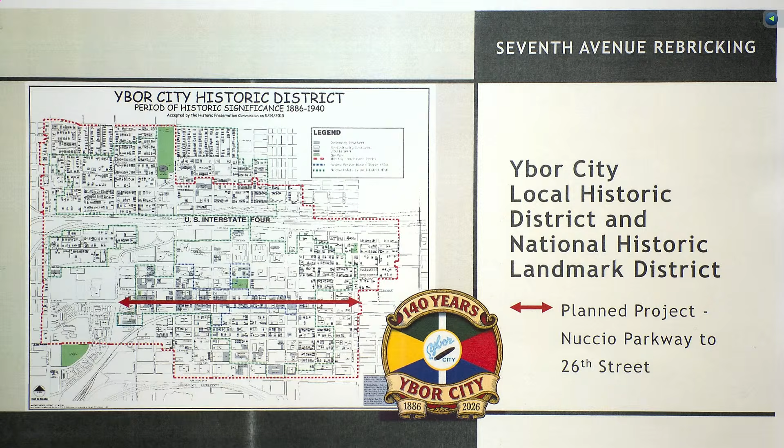So early in Ybor City's history, the roads were sandy dirt, which was not easy for most means of transportation to traverse. Bricks were laid on the Ybor streets beginning in the late 1890s through the early part of the 20th century. Later, the bricks were removed from 7th Avenue in the 50s, and the streetscape continued to change with urban renewal.

One reason for the change that was cited was that many suppliers of brick pavers had gone out of business, resulting in a shortage, and asphalt presented a less expensive, durable alternative at the time.

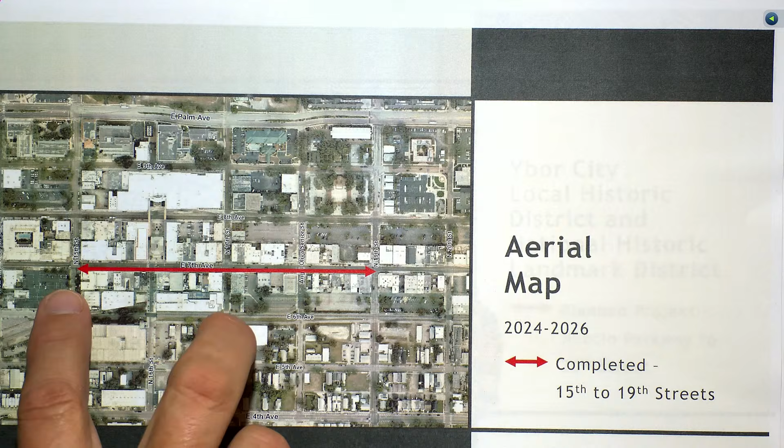15th to 17th Street, essentially this section right here, was completed in 2024. This project has been funded through Community Redevelopment Area funds, as approved through the CRA and council acting as a CRA board. Phase 2 included the area between 17th and 19th Streets, with the exception of the intersections. The intersections had to be engineered, so we had to do that separately.

And over 140,000 bricks have been laid thus far in this project. One moment, we don't have it up on our screens here, or do we not? Now we do, okay.

See some of the images from the most recent completed span. As I said, this takes large quantities of brick. Most of this brick is not in a centralized location, so it has to be acquired, and that's why the project is happening in phases.

In this particular section, we were diligent about finding a limited inventory of the manufactured brick in order to get a more consistent surface and have it be rideable. So it's always going to be somewhat traffic calming with brick, but we wanted it to be as smooth as feasible. As you can see, the red bricking enhances the character and feel of the historic district and also provides a natural traffic calming and promotes walkability.

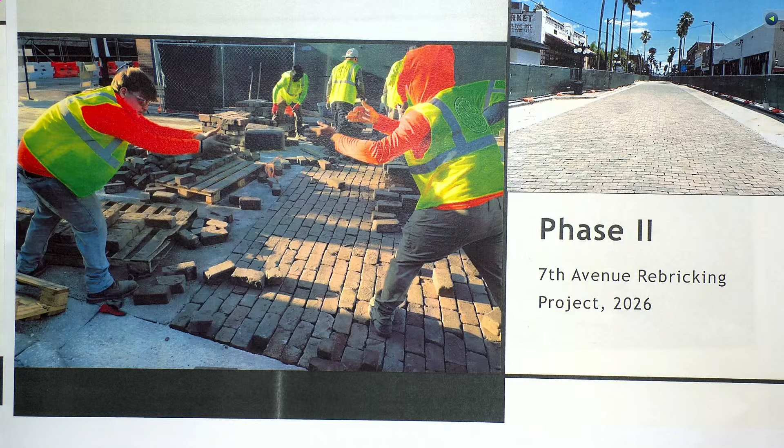And that concludes my briefing. I'm happy to answer any questions if you have any.

So next, I did want to just call to attention— oh, sorry, I was just going to say, I did a little self-guided walking tour recently, and it makes such a big difference. It looks really good. Yeah, I agree. It definitely, like we said, it enhances the character, so definitely adds to the environment on 7th Avenue.

Next, we wanted to jump into our preservation in progress, our reoccurring look at preservation in the city of Tampa and projects that are really worthy of being focused upon. This month, we're focusing on the Tampa Theater as it celebrates its 100th year. And as such, Elaine is going to provide an overview of the work that's underway currently with the theater.

Elaine? Thank you. Good morning, Commissioners. Elaine Lund, Historic Preservation staff. If we can move to the PowerPoint presentation.

We're looking at the Tampa Theater and Office Building at 707 to 711 North Franklin Street. This is a local historic landmark. Is that up on your screens? Okay, wonderful.

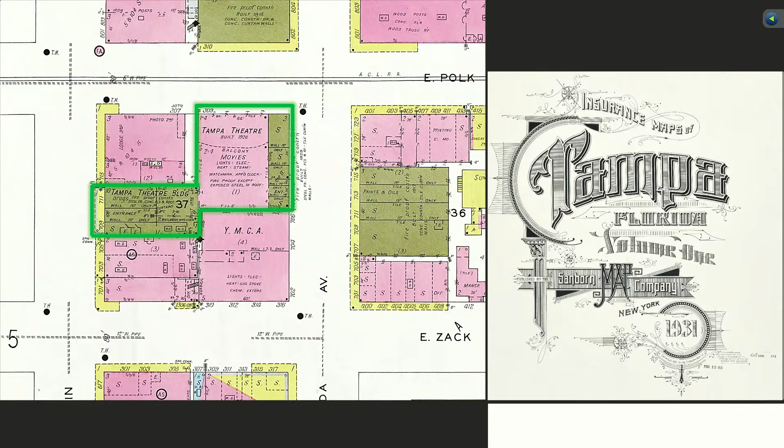The building was listed in the National Register of Historic Places in 1978, and it was one of the first buildings listed as a local historic landmark by the city of Tampa when the citywide historic preservation ordinance was enacted. The designated local landmark site shown here indicates the theater lobby with the entrance off Franklin Street and the first floor of the 10-story office building, and the auditorium at the corner of Florida Avenue and Polk Street.

Construction of the Tampa Theater and Office Building began in late 1925. John Eberson of Chicago was the architect. He designed over 100, possibly closer to 200 movie palaces throughout the United States and in other countries. R.E. Hall, an engineer and architect from New York, worked with Eberson on the Tampa Theater and other theaters of this era, including some in Miami. George Miller, a local Tampa builder, constructed the project. The theater opened on October 15, 1926.

Here you can see the auditorium under construction in March of 1926, with the steel frame in place and the hollow clay tile for the curtain walls on site.

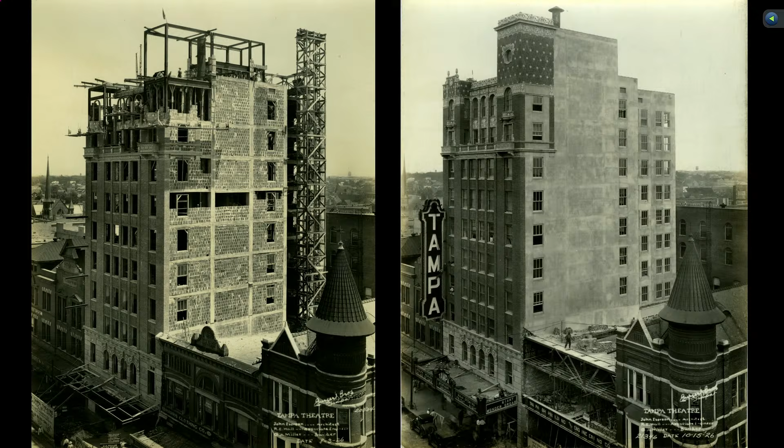The highly ornate Tampa Theater was designed in the Mediterranean Revival style, which was popular in the 1920s. This Mediterranean Revival style features an eclectic mix of details drawn from countries bordering the Mediterranean Sea, including Spain, Italy, and Morocco. The 10-story office building has an asymmetrical facade with balconies, balustrades, finials, and terracotta accents. Most of the ornamentation on the building is seen at its base and on the upper stories.

The marble and cast iron box office and main entrance, which remains in place, opens to Franklin Street.

Upon entry, an extended lobby leads to the theater, originally designed to hold 1,600 patrons. The interior is richly decorated with wrought iron lamps, carved wood chests and chairs, statuary, wall hangings, medallions and coats of arms, and paintings in the style of the old masters. Some of the furnishings chosen were genuine antiques, including Venetian lanterns and Spanish and Italian pottery.

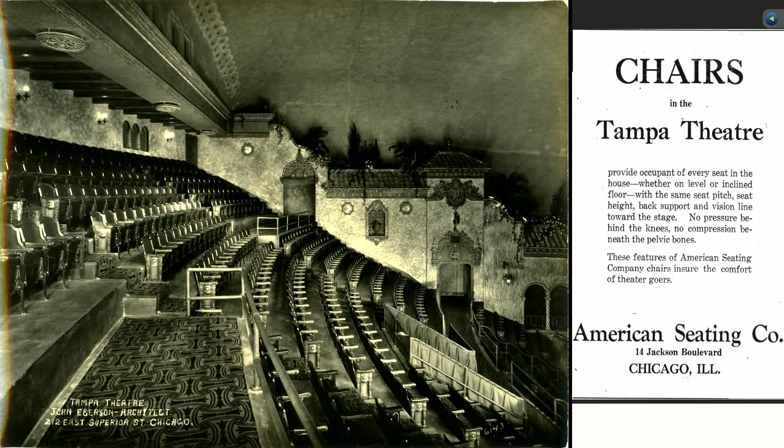One of the major draws of the Tampa Theater was its cooling system, which also filtered and dehumidified the air. This allowed theater goers to sit in comfort in the atmospheric theater, which was designed to resemble an open courtyard surrounded by facades with arched galleries and balconies, featuring wrought iron grills, window grills and railings, and topped by tiled roofs with accents of exotic vegetation.

The ceiling is designed to resemble the sky, with lighting that mimics the rising and setting sun and twinkling stars. The theater also has an orchestra pit that holds approximately 20 musicians and a Wurlitzer theater organ, which provided the scored music that accompanied silent films.

The art in the theater proscenium includes reproductions of famous sculptures by Michelangelo and some from antiquity, such as the Venus of Ostia and figures from mythology.

So the current work that's being done at the Tampa Theater was reviewed by the Architectural Review Commission for the exterior rehabilitation, which includes the masonry cleaning, sign repainting, and minor repairs. On the interior...

The ARC typically does not review the interior work. However, it is notable that the theater is working with restoration companies who are highly experienced in working with this sort of historic finishes. The first floor offices in the Florida Avenue wing of the Tampa Theater are being renovated

to facilitate a green room, storage, restrooms, and a break room. In the theater, the pit below the stage will be structurally renovated and a new organ lift will be installed. The stage floor will be replaced and a new accessible access to the stage will be achieved with an operable lift. The second floor of the Franklin Street Tower will be converted into assembly space for exclusive events.

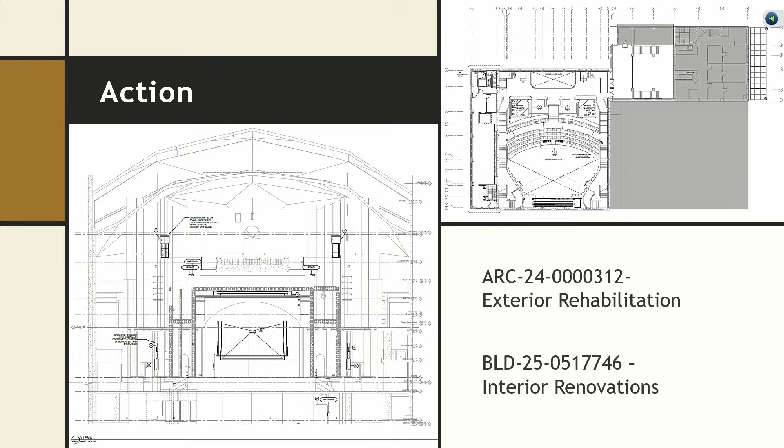The full and authentic restoration of paint and plaster will require that expert artists be able to access every square inch of the auditorium's ornate walls and its starry ceiling. So the first step was to fill the space with multi-level scaffolding. This way, the Tampa Theater can fully restore the historic auditorium to its original grandeur.

Some of the work includes simply plaster repair and painting.

The building's infrastructure is being upgraded as well. So renovations to the theater will increase lighting levels in the lobby and stage areas with new mechanical and electrical equipment.

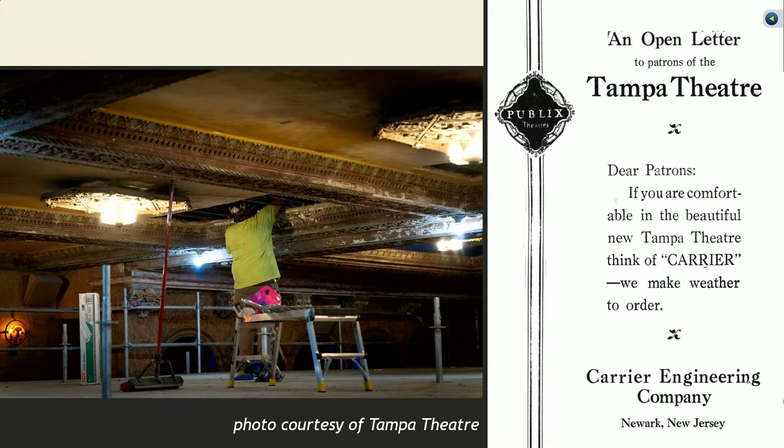To accommodate the theater's expanding education program, more than 3,000 square feet of underutilized office and storage space on the Florida Avenue side of the building is being remodeled to make way for dedicated classrooms.

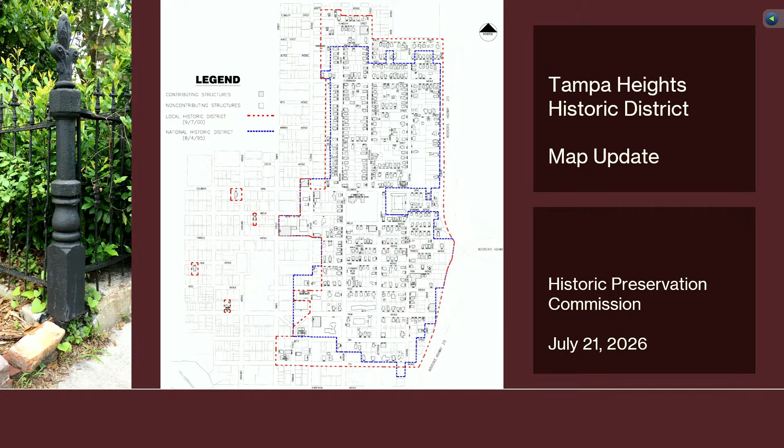Our update today is on the Tampa Heights Historic District map, including the boundaries and the inventory. To give you an overview of the area, Tampa Heights is just north of downtown and was established as an early suburb of Tampa in the late 1800s. This area is primarily residential with a few commercial corridors. It goes a little bit north of Floribraska Avenue up to Robles Park on the north side. The western boundary is generally Florida Avenue, although it's shown here in red, and you can see that there are some areas where it extends over to Tampa Street.

On the east side, the boundary is Interstate 275, and on the south side, the boundary is 7th Avenue. There are a few outliers, little satellite properties on the west side of the historic district. These are individually significant buildings that were found, through the years, to be significant enough to contribute to the historic district, and had owners who opted into the designation process when the district was established.

The period of significance for the Tampa Heights Historic District is pretty broad, going all the way from 1890 to 1945. The district was listed in the National Register in 1995, and the local historic district was designated by the city in 2000. At our last count, we had approximately 200 acres with over 500 buildings, and approximately 60% of those were contributing. There are some images here showing a historic picture and a contemporary picture. The district reflects a wide variety of architectural styles, from free classic Queen Anne to craftsman bungalows.

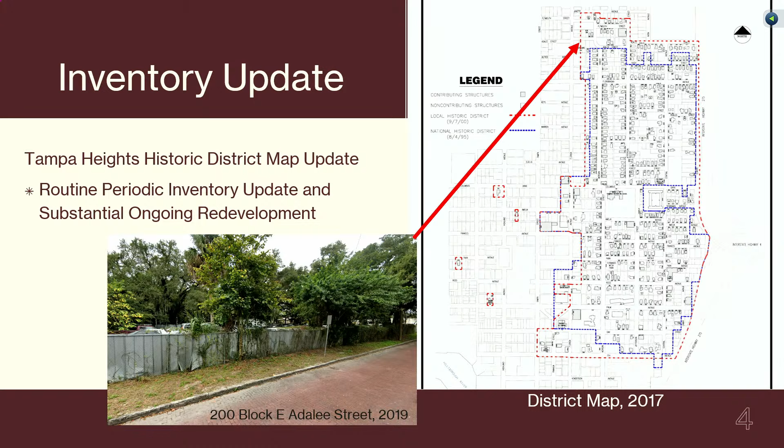Staff periodically updates our historic district maps to make sure they reflect the current inventory. Our last map update was in 2017. Additionally, substantial redevelopment in the greater Tampa Heights community has added a number of new buildings. You can see here in the image a block of East Adalee Street on the north end of the Tampa Heights Historic District. Today there are 3 new buildings on the south side of that block and 1 on the north. So with the amount of new development in this area, there's definitely a need to update the inventory.

This year we're working on the field work necessary to make sure we have all the inventory updates correct, including new construction, demolitions, changes in status, and relocations, to make sure those are accurately reflected on our map. By my current count, these are estimates, approximately 50 new buildings, a couple of relocations, and a few demolitions on hand, mostly non-contributing structures, but there have been some unfortunate incidents with the hurricanes in 2024 and a couple of fires that have resulted in the loss of approximately 5 or so contributing buildings.

These numbers are estimates based on the city's GIS data, and we will be field verifying that as well. So when we come back to you with the final inventory, we will have solid, less approximate numbers for you.

The image here is showing one of the relocations that happened a few years back, from 604 Francis to 602 Francis. This was necessary to relocate the building as part of the interchange expansion between Interstate 4 and Interstate 275. The parcel this house was on was owned by the Florida Department of Transportation. They offered the building for sale, and all the new owners had to do was pick it up and move it one parcel over. Sounds simple.

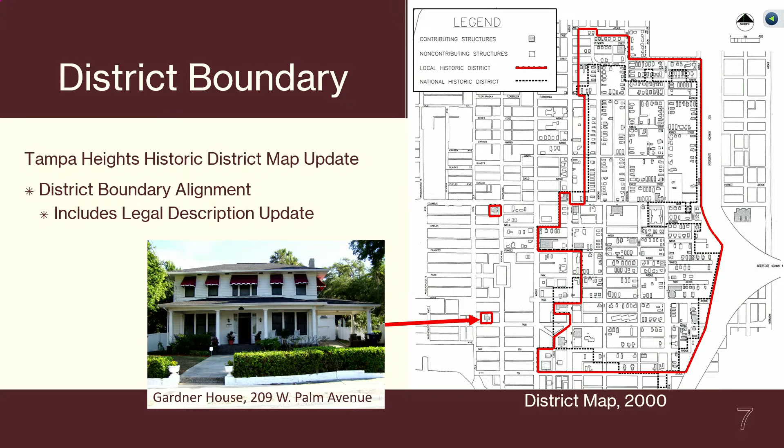Taking a closer look at the north end of the district, this was expanded to the north of the National Register District, partially for the purpose of including the Graham Bottling Works building, as well as being able to apply the standards consistently throughout the residential area.

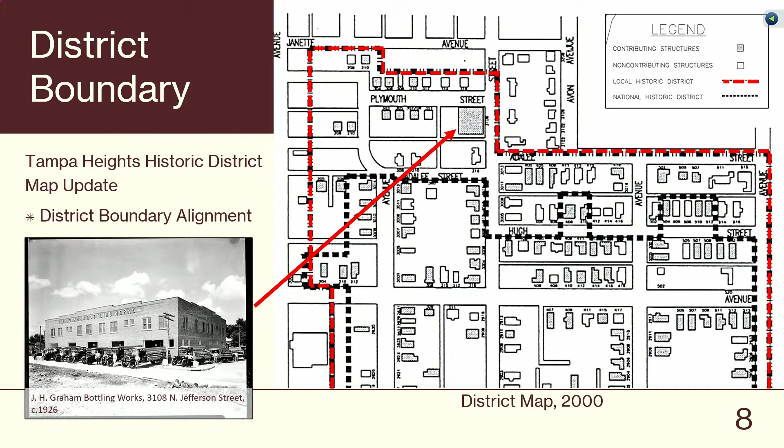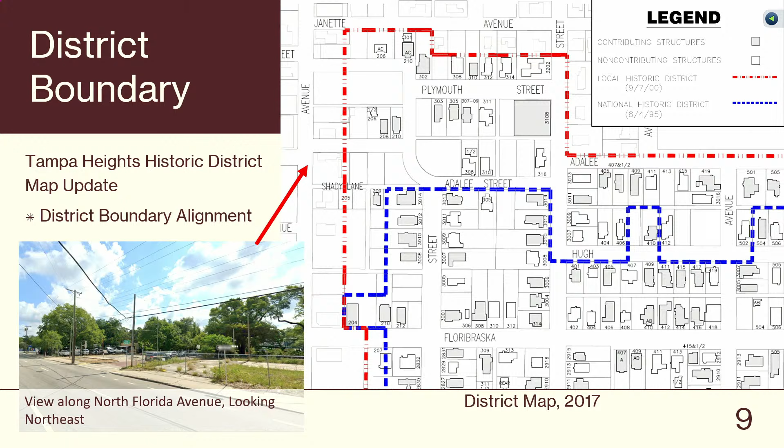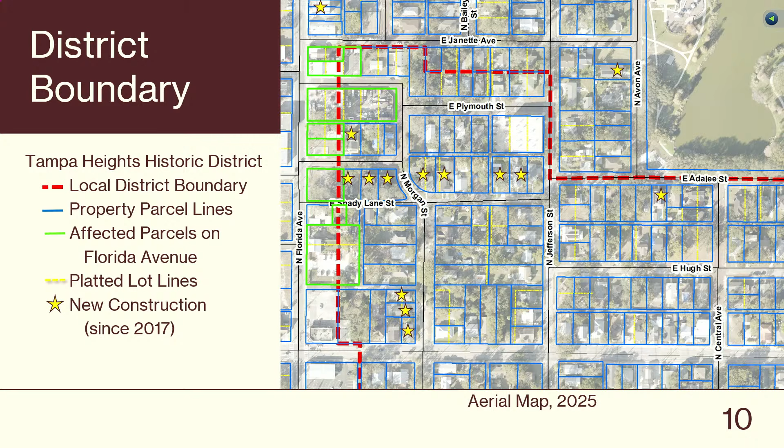As an example of some of the new redevelopment we're seeing, in addition to the residential construction within the district, this is one of the lots that's split by the historic district boundary, at 3101 North Florida Avenue.

There is a rezoning going through the process right now, and it will actually be at a city council hearing this Thursday evening. This particular project initially—and this is just the initial presentation, not what's actually represented for approval this week by council—initially presented a site plan on a parcel that had about 10 feet on the east side falling within the historic district.

The plan has since been altered to remove the vertical construction from within the district boundary. But as initially presented, the building would have been partially subject to review by the Architectural Review Commission, presenting a challenge for the designers, wherein the design guidelines would only apply to part of their project. So one idea staff is considering is to adjust the district boundary to align with the parcel lines or the platted lot lines, removing the parcels that front Florida Avenue from the district in their entirety.

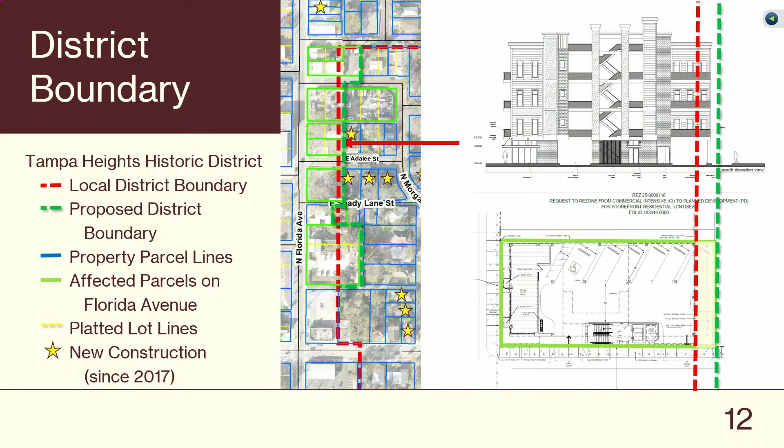Oh, that makes sense. So because a lot of the properties, the lots on Florida Avenue are empty, open for redevelopment, because of the proximity to the district they would consider their design when they develop it, right?

Right, there'll still be design regulations put in place—not the Tampa Heights historic guidelines, but we would take a position of ensuring that development occurring in proximity to the historic district doesn't cause an adverse effect to it. I imagine most of these are going to go through the PD process, just because they're sort of obsolete uses on there—commercial general, but with an industrial lean. So I think we're going to be seeing rezonings, and we have a system in place to participate in that process. Thank you for the clarification.

Quick question on the commercial properties on Florida: is there anything formalized about the transitions, or is it more your prerogative as part of the design review, part of the PD, or is there anything written into the design guidelines or zoning standards about making transitions to the historic district?

There's not specific language about transitioning within the zoning code. It does give the historic preservation manager engagement with these processes, so you have basically an administrative context you can add to the request. The comp plan, the city-county comp plan, does make references to proximities and areas of transition, so sometimes we will utilize those as a means.

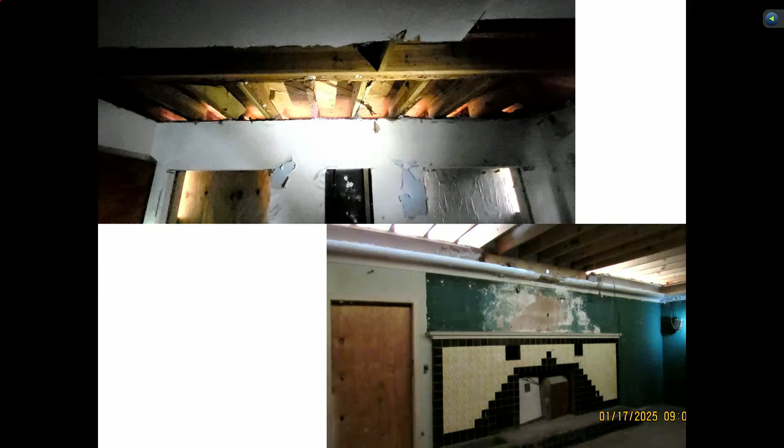Some of the work done to date did include replacement of the roof and roofing structure to meet current code. As you see in this picture, the new roof structure was really the most paramount thing we had to accomplish, to keep the building watertight. And in doing so, we discovered a number of things that had to be addressed structurally as we went through that process.

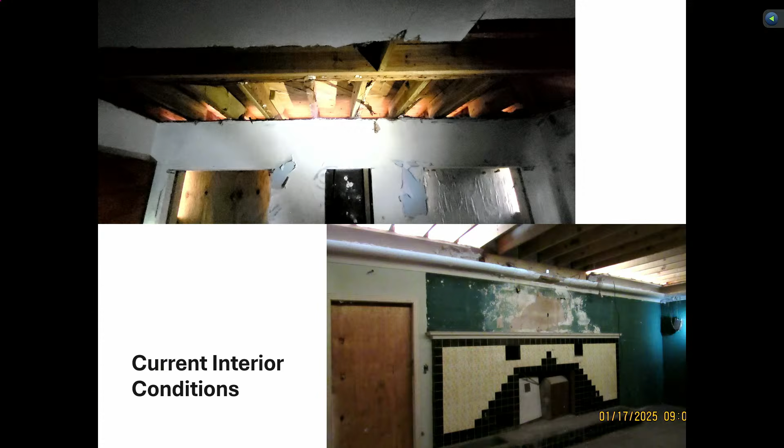In the living room, you see the main tile surround of the fireplace. That desk I was pointing out, that Mr. Guida was sitting at in the historic picture, would have been just to the right of that fireplace.

This is a mural on the inside sunroom of the house. It is still in place. It does not have that date on the bottom of it—that's just our camera. But it does represent the original house, the heart-shaped driveway as you can see, some of the color patterns that were originally on the house, and you can even make out that ship up there on the rooftop.

The rooftop does have railings that surround it, and historically it was used as a gathering space for some parties. We're not going to be able to accomplish that in our current environment for a number of reasons, egress being a main one. But we will be restoring it back to its original look, and also repairing anything on the chimney itself that needs attention.

Luckily, we were able to obtain the original drawings from the family, which had a lot of the original handwritten notes. I'm told that Mr. Guida did these drawings himself.

Interestingly enough, this site was the original location for Hugh Macfarlane's house. He did not end up building the house, but he had built a basement in it when Mr. Guida acquired it from the family. So Mr. Guida kept the basement and added a two-story house above it.

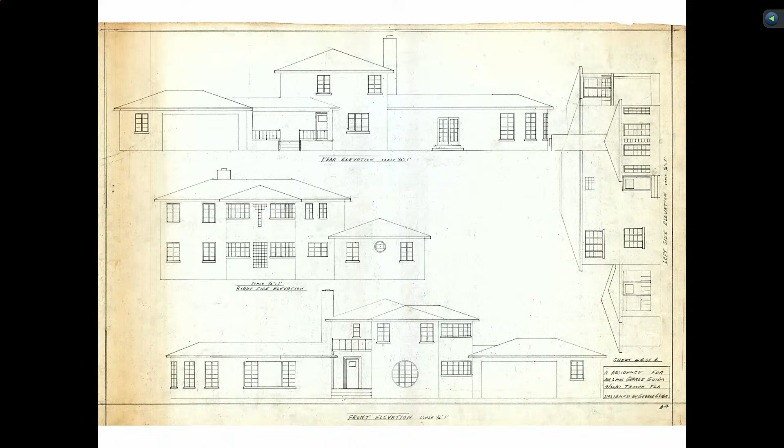The basement still exists and will be part of the use process as we get into being able to offer catering services and whatnot at the house for events. There were changes made to these original drawings, but the detail and specifications, the measurements, are very accurate, and so we have been relying on these for the restoration of some of the elements.

So just a few things to touch on. First of all, I think it's important to begin with the collaboration with the city's administration and city council. I think everyone I've talked to is really excited about this project. It's something in West Tampa that's been a long time coming, and we're very happy that the administration was supportive of our proposal to adapt it into a more public use.

We have, obviously, the enhanced fence there in the front. There are actually two fences around it right now. We've installed security lights and an alarm system in the house to monitor it during construction.

We've consulted with mural experts and conservators to preserve both the house mural and restore the chimney mural. We have great photos of that, so we don't see that being an issue. There is tile damage in the house which will need to be repaired, but we're also preserving one of the main restrooms with some very elaborate tile work and inlaid artwork, and we'll be relying on them as well for that restoration process.

We've conducted a great deal of research to replace damaged and missing historic materials. We are working with Wilder Architecture, a very well-established historic preservation architectural firm, and they have been excellent in identifying materials that would be compatible with this structure. The drawings are currently, really, almost at 100%.

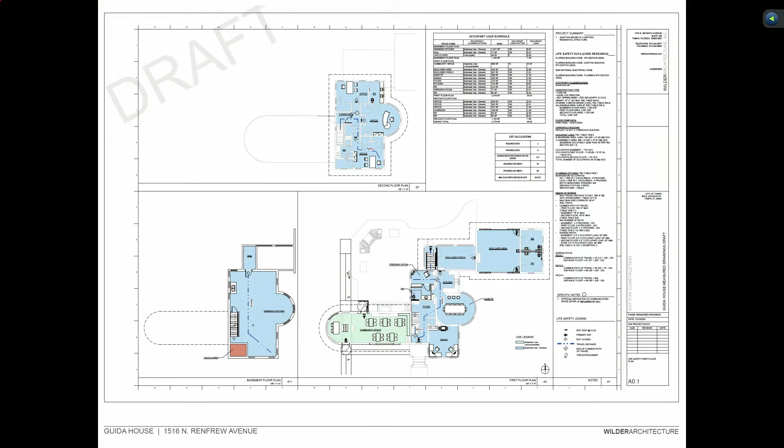In addition to the interior spaces, the house features, I think, a very ahead-of-its-time outdoor kitchen and gathering space that had a barbecue and coolers and sinks and everything for entertaining outdoors, not in July or August. But it has a unique cracked tile patio, and some interesting architectural features that were added on these different structures that Mr. Guida had incorporated or that his wife suggested.

So some of the images we're looking at - this is one of the early renderings of the property. You can see what we were trying to exhibit here was the way that a very gradually sloped ramp could be added, that actually turns 90 degrees then up to the main entry, so that we can ensure as much access to the property. It has split level floors throughout, so there's a lot of ups and downs that need to be managed through these different ramps.

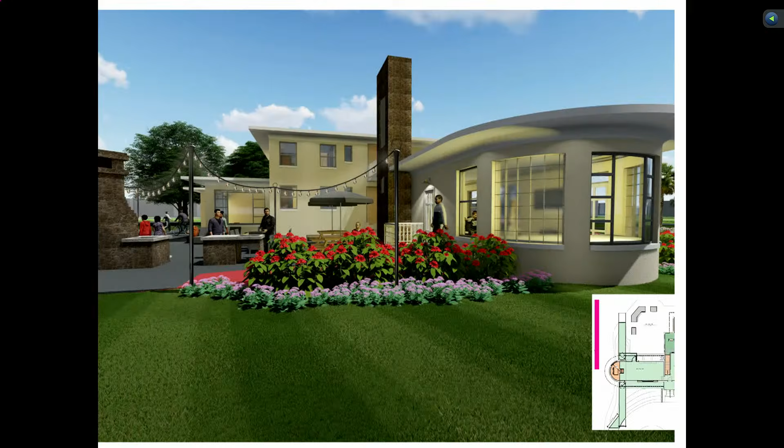This is an image of the rear where you can see the outdoor patio area and a second ramp that will lead into community space 1, providing access into and from that room. And then the restoration of the outdoor area - we do think that this is going to be a very desirable location for outdoor events, and we have left room on site in case tents have to be placed, so if they want to do a larger event, that can accommodate that as well.

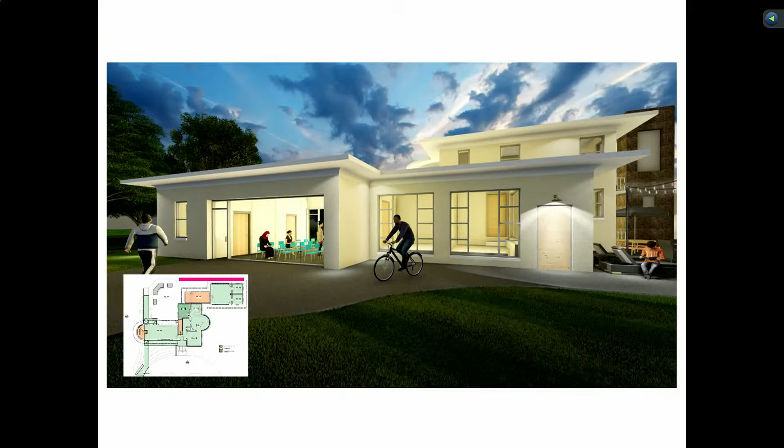This is moving towards the rear, a view to the east from the back. That outdoor patio area would be on your right side, and the center behind the gentleman on the bike is a sunroom.

Beyond that wall in the back is where the mural is that will be restored. Then you see the carport area with its glazing, so it still keeps its relationship of being a void on the spacing of the house, but provides the ability for us to add more usable, conditioned space, and ensure the property is better secured.

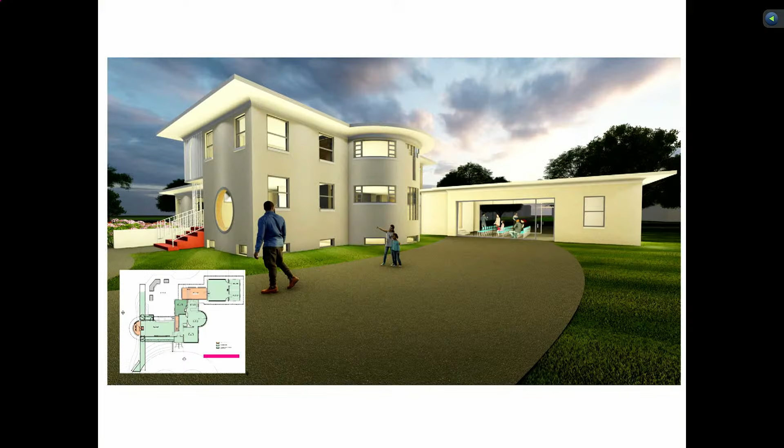And another angle, opposite of that perspective from the front side, you see the restoration of the windows, the restoration of the exterior, and just really a holistic approach of bringing this property back to use for a new purpose, but with the same spirit that has been known to the community throughout the years.

This is an early example of interior community space one. What will occur in here will be smaller gatherings with flexible spaces for furniture and open spaces. Interestingly, you see the lighted soffit across the ceiling.

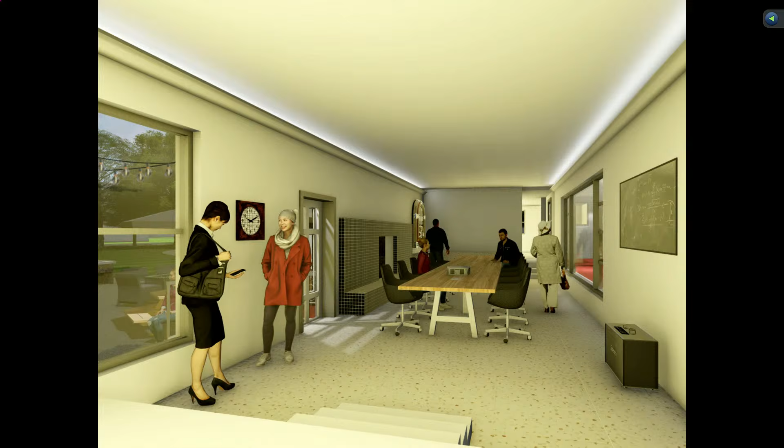That existed historically, it's in place, and so we are restoring that. We're taking out the fluorescent tubes and converting them over to LED, but it will be the same effect that the Guidas enjoyed while they occupied the house.

So tomorrow there will be a kickoff celebration at the George Guida Senior House for the restoration project I just summarized for you. It begins at 10:30. I included some invitations for you in your packets if you're able to join us.

The mayor will be revealing the final artist illustrations of the house, as well as Councilman Maniscalco providing some of his experiences and remembrances of the Guida family. And Mr. Guida's son, George Guida, will be there as well to talk about his family and celebrate the progress being made, as well as many in the community who are very excited about this.

If you are available, we'd love to see you, and if not, we will definitely keep you informed of this project along the way. Thank you.

Thank you for that, thank you guys for your work. That's a beautiful building, I automatically thought wedding, so that'll be a great wedding venue. And then I saw the back with the pit, and I said, even better. And you can put tents. Yeah, but that's a beautiful building.

I really appreciate the carport section, because even though it's an enclosed space, you can tell what it was originally. So people there, even if they're not architecturally informed, would be like, oh, this would be a good carport space. I like how the designers really thought about ways to honor the building as it was originally built, but use it for today's use. So thank you for that, thank you for your work.